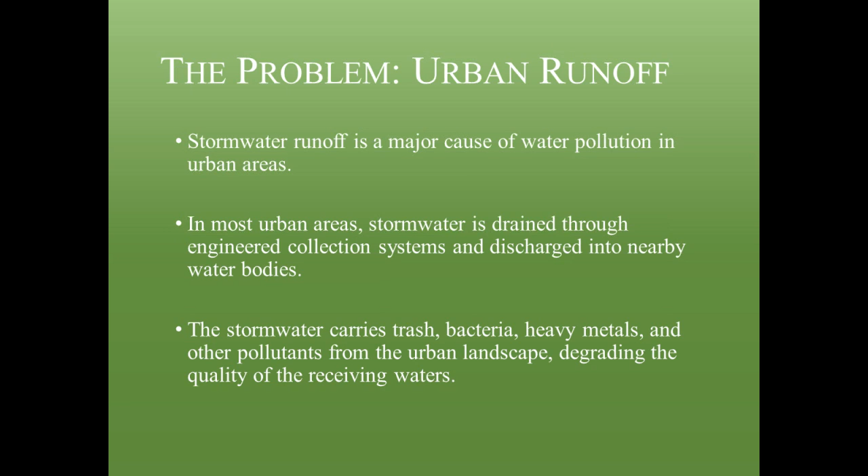Communities are facing many challenges with the increase in impervious surfaces. It means higher peak flows, and even on the best days, when we do water quality monitoring in San Diego, any kind of rainfall event will cause our beaches to become contaminated. That's not because of sewage, it's just runoff from streets and people's landscapes. We've long recognized that this is now a leading cause in the United States of water quality impairment.

So even small amounts of impervious surface cover can lead to significant impacts.

Let me go, sorry—you were not following the same slide I was. All right, that's where we were. Can you go back? Okay, let's get normal. All right.

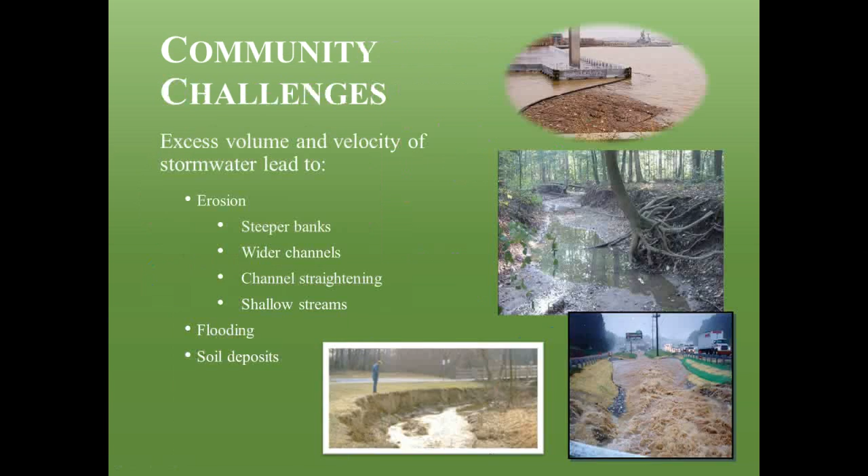So what is green infrastructure? EPA defines it as systems and practices that use or mimic natural processes to infiltrate, evapotranspirate—the return of water to the atmosphere either through evaporation or by plants—or reuse stormwater or runoff on the site where it is generated.

Green infrastructure uses vegetation, soils, and natural processes to manage water and create healthier urban environments. At the scale of a city or county, green infrastructure refers to the patchwork of natural areas that provides habitat, flood protection, cleaner air, and cleaner water. At the scale of the neighborhood or site, it refers to stormwater management systems that mimic nature by soaking up and storing stormwater.

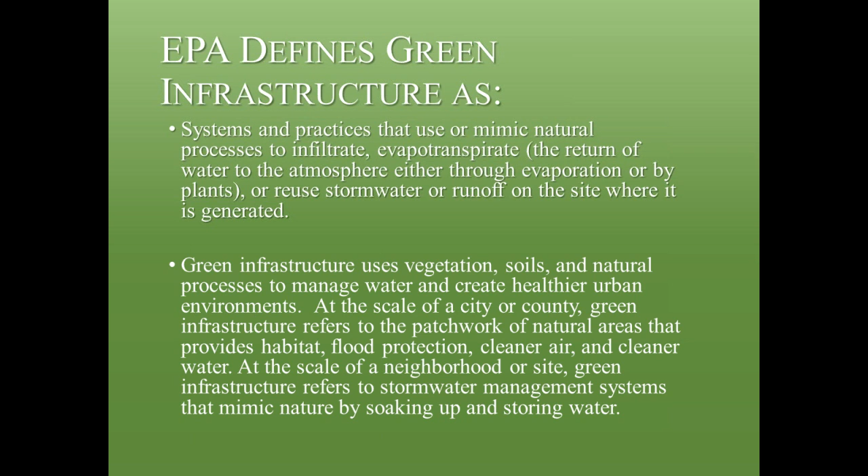One of the questions I had when I first heard the term green infrastructure is what's the difference between that and low impact development. Does anyone have an answer? Because I still don't—I think it's sort of the term of art today for what we used to call low impact development. It's rebranding.

All right, let me see how—okay. Green infrastructure solutions for water quality and quantity have benefits for pollutant discharges. It reduces flooding, and has stream and groundwater impacts. It also has significant benefits to air quality by sequestering carbon, and it's a great benefit to the community.

We all know, especially in the border region, the amount of green space available for residents is very limited and gets smaller every day. So if we can do projects that increase the area of green spaces, providing the community and residents with recreational opportunities while improving water quality, it's really a win-win.

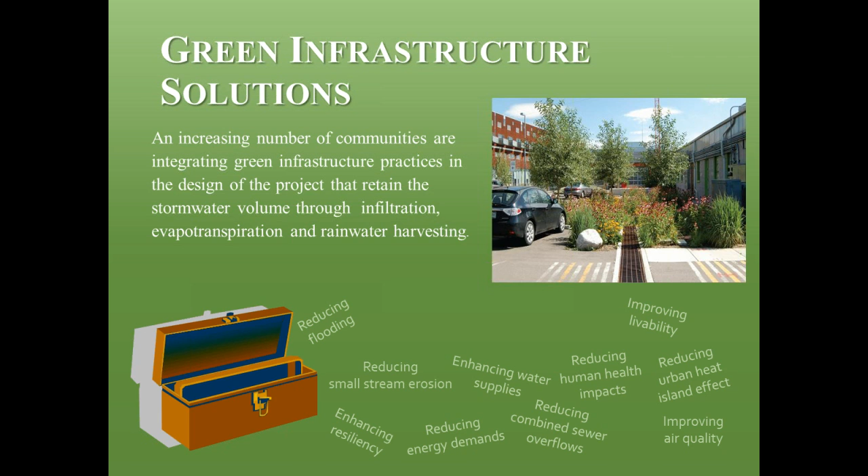I'm going to get good at this fairly soon, but these are terms you will hear and may already know, though some of you may not. There will be a quiz on this a little bit later, so you can write down these terms, or I'll share this PowerPoint with you in a bit.

Rainwater harvest systems, detention ponds—these are considered dry ponds. Retention ponds, which are considered wet ponds, are things like artificial wetlands or pools that capture stormwater but are maintained as wet, which probably in the Southwest is not the best green infrastructure example. There's also bioretention basins and rain gardens, which are very common.

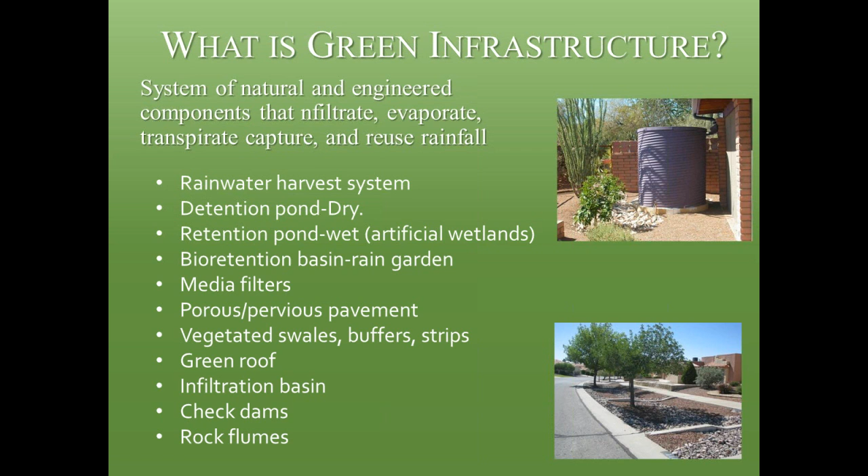We're seeing these used to treat runoff from parking lots. There are also media filters, porous or pervious pavement, vegetated swales, buffer strips, green roofs, infiltration basins, check dams, and rock flumes. I'm going to give you an example of each of these, but again, this has huge benefits in all of these following areas.

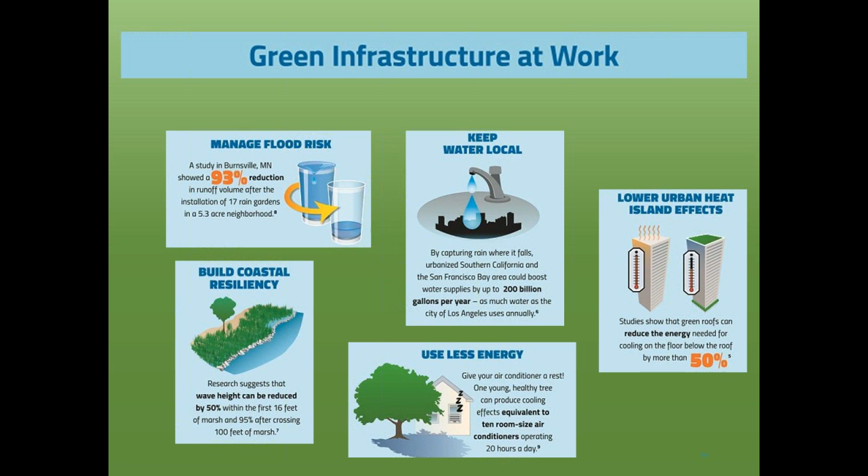All right, you're on the same page.

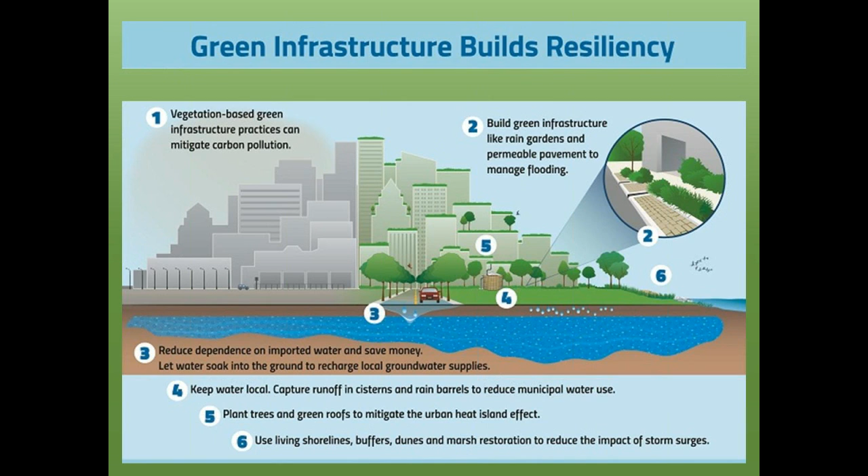Cities in the United States are starting to invest heavily in green infrastructure, building things like rain gardens and pervious pavement. You're going to hear these terms again and again: reducing dependence on imported water, keeping water local, planting trees to cool the cities, and using living buffers as a means of reducing storm surges.

These definitions come from our Office of Research and Development in Las Vegas. Rainwater harvest systems, they somewhat speak for themselves, but you can install these at a household level or on a community building as a means of capturing the water that's falling on your roof.

It provides a source of water, but it can also reduce the amount of runoff, which is very important in the Southwest region, where even a small amount of water can cause significant erosion problems. I'll show you some slides about Tijuana. We're looking at the idea of maybe putting some of these in Tijuana and seeing what impact they might have on reducing erosion.

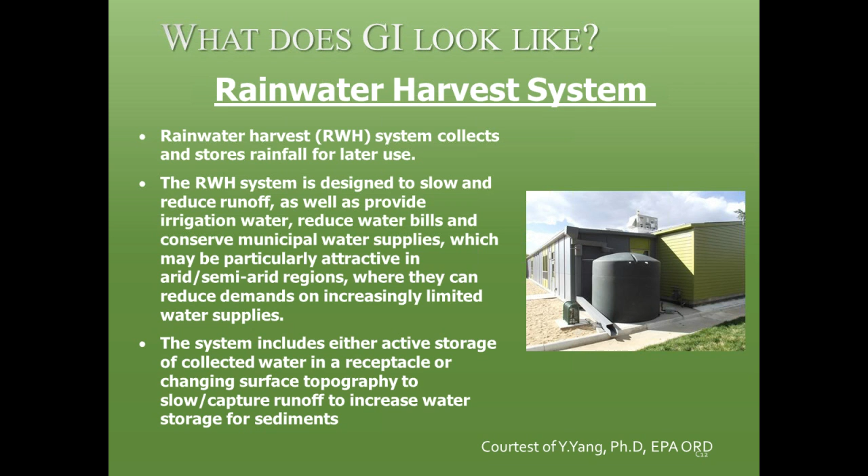The next is dry detention ponds, also known as dry ponds or extended detention basins. These are ponds designed to hold stormwater runoff, in this case for 24 hours, but we've seen even a short retention time significantly reduce pollution. The check dams we put in Nogales, Sonora have really created some dry detention ponds in essence, allowing pollutants to settle out and also reducing peak flows.

They're reasonably effective in removing sediment and other pollutants associated with particulate matter, and they can play a key role in downstream channel protection if appropriately designed, by reducing the peak flow runoff from storm events.

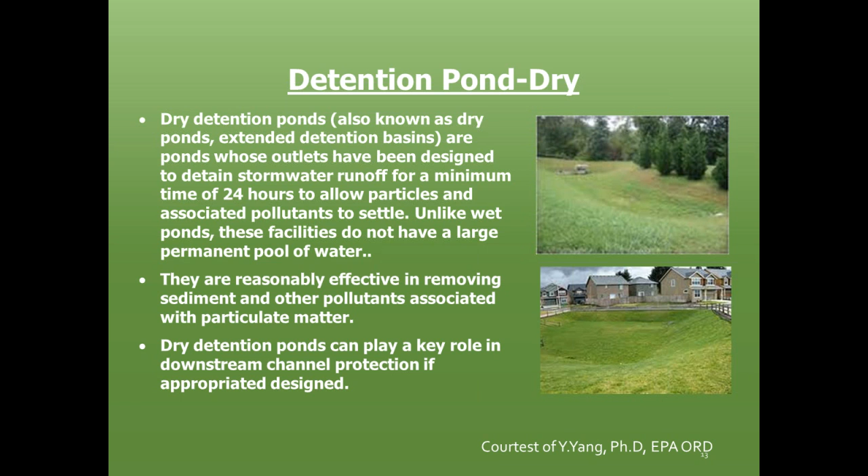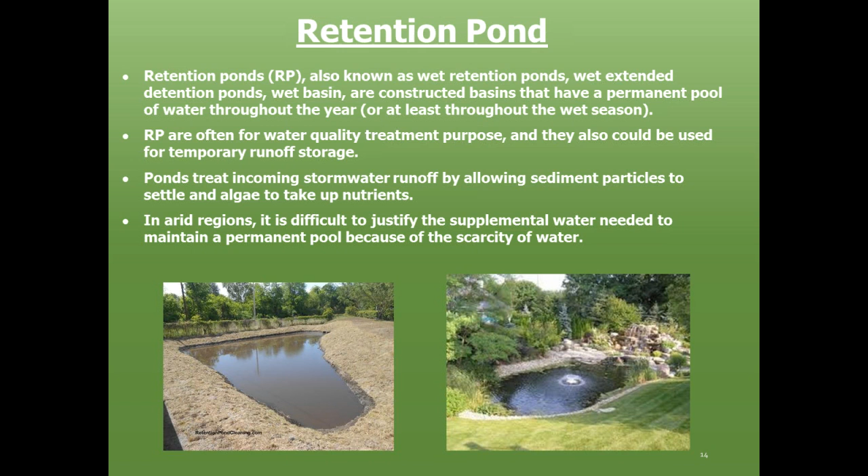Now these are wet ponds, and I haven't seen them in the Southwest region. Back east, I'm sure they're more common. I guess, perhaps wetlands used to treat stormwater - the problem with these is that they require a continuous source of water because they have to maintain the algae and plant life, which is what helps reduce the bacteria. So in the Southwest region, where our rainfall is so periodic, it's hard to maintain that. But now you know about it, so you can remember that term the next time you see one.

Bioretention is rain gardens, and I like to think of rain gardens versus swales. Rain gardens tend to be used on a smaller scale for things like parking lots, and you'll see a lot of examples of these in some later slides. They use landscaping features essentially in order to capture local stormwater runoff.

Finally, there are media filters. I know Carmen is working with some people at Filtrexx, using some of their compost as a means of providing compost socks as a way of reducing sediment runoff. The whole concept is to try to keep as much stormwater on site as possible, reduce peak flows, and keep pollutants out of the storm drain system. This is what compost socks or sand filters can do at a very local level.

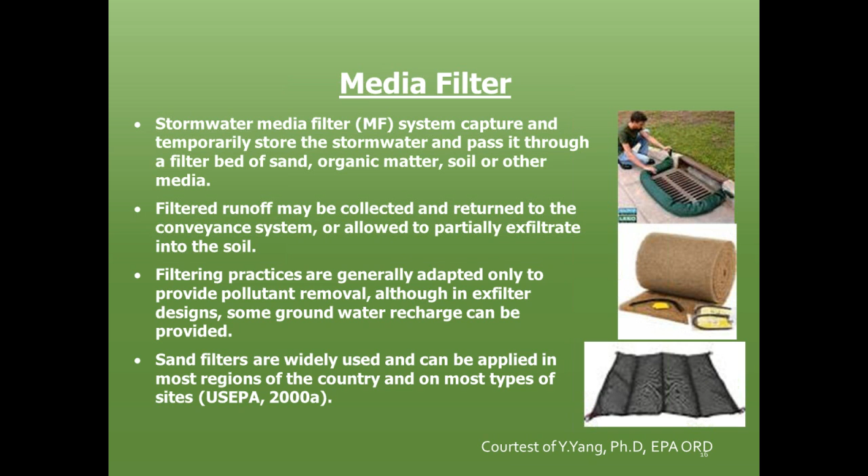Porous pavement is one of the most popular options, and we have actually tried to do this in Tijuana. It's not super simple, in that it requires you to understand your soil quality, how pervious it is, have some type of substrate or rocky material above the surface, and then apply the pervious pavement on top of that.

I think this is an area that deserves a great deal of attention, to know where it's appropriate to use. The gym I work out at has it, and I notice it does a tremendous job at reducing stormwater—you never see flooding in that portion. If we had that when I was working in the paving business, I certainly would not have had to raise that issue.

The thing is, on highly trafficked areas it does wear down much more quickly, so it makes sense for certain areas, and it's important to know where those are. I'm really hoping this conference helps us identify the appropriate green infrastructure practices for each place, because it's easy to say you can put in pervious pavement, bioswales, or water cisterns to capture rainwater—but these things cost money, and somebody has to invest in them. If we can figure out where you get the most bang for your buck, I think that's the goal of becoming more educated in this area.

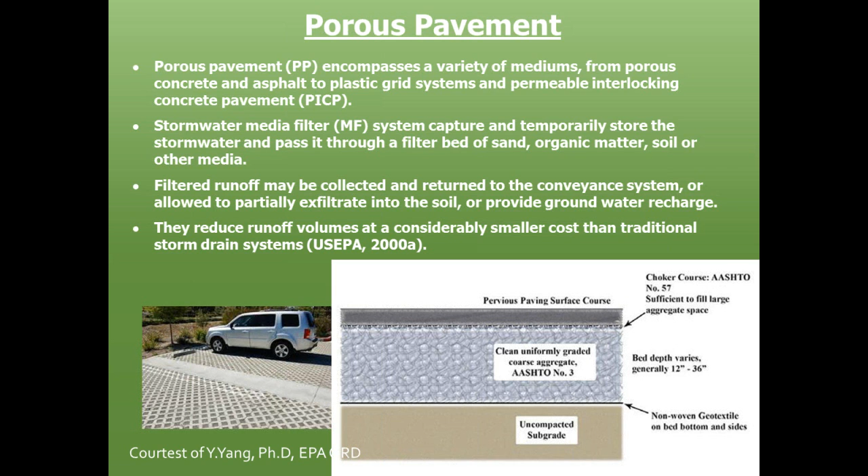This is vegetated swales, buffers, and strips—very common, also referred to as grass channels, biofilters, bioswales, or swales. They refer to vegetated open channel management practices designed specifically to treat and attenuate stormwater runoff for a specified water quality volume. As stormwater flows, it's treated through vegetation, slowing the water to allow sedimentation, filtering through a subsoil matrix, or infiltrating into the underlying soils. Swales are well suited for treating highway or residential road runoff because they are linear practices.

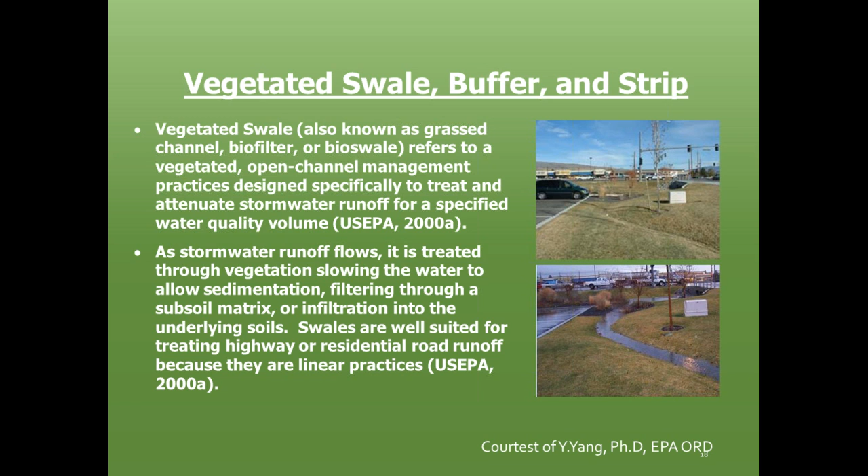Green roofs—they kind of speak for themselves, but it's putting vegetation on top of the roof as a means of capturing water and cooling the residents. It can be effective in reducing stormwater runoff simply by capturing water, similar to water harvesting practices. I added 'don't try this at home,' because years back there was a building in Europe that collapsed because it wasn't designed for a green roof—someone decided to add a garden on top over time, and the weight of the material ultimately collapsed it.

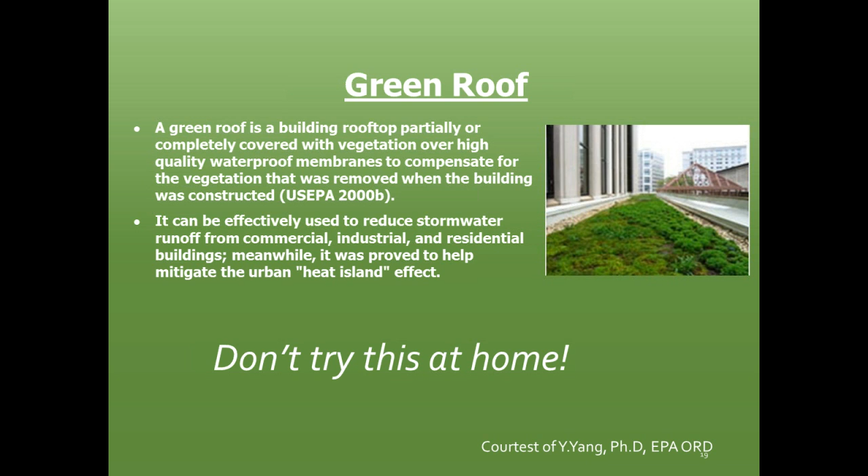So I think it's a great thing for new developments. For existing developments, you really have to know what weight your building is designed to take and study it well, as opposed to trying it after you return from this conference. There are other things you can try, but that's not one I'd recommend.

Finally, there are infiltration trenches—a rock-filled trench that receives stormwater runoff but has no outlet. This system is designed to infiltrate stormwater into the soil. Runoff passes through some combination of pretreatment measures, such as a swale or detention basin, and then into the trench, where it's stored in the void space between stones and infiltrates through the bottom into the soil matrix. This is really the final destination of the stormwater.

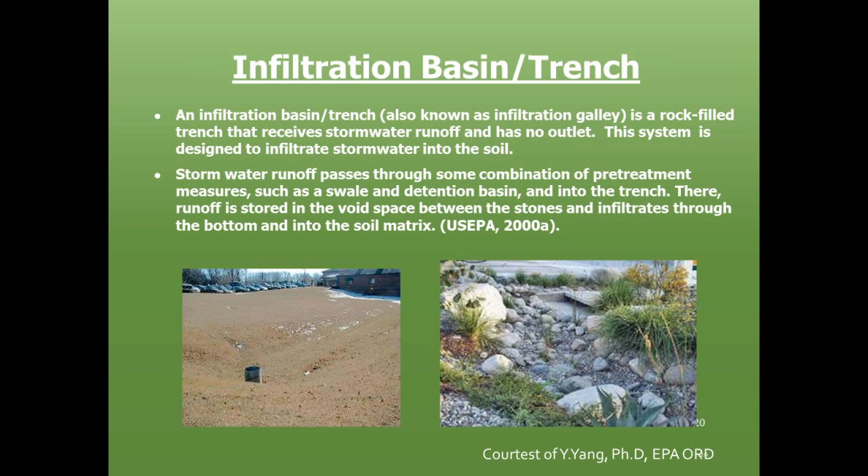We're going to go through some examples now, starting with a very large-scale example in Milwaukee, Wisconsin, where an entire brownfield site was revitalized to mitigate the impact of a 100-year storm event. This is a 70-acre stormwater park that also provides a high-value community recreational asset.

Where am I? How did that happen? All right.

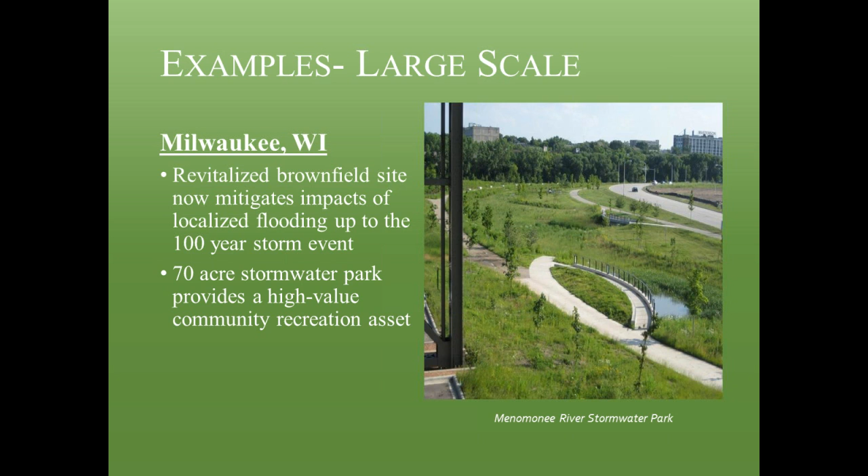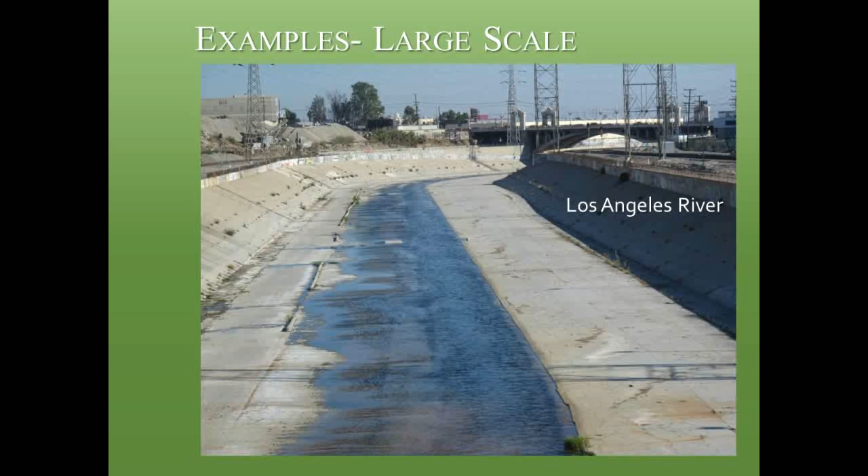Here is the LA River, another very large project. This is what the current designs look like—this has not yet happened. This is the LA River, and this is what they are looking at for the LA River. There are designs in place.

Right now it's just lacking funding, but this is the ultimate goal for the LA River. We see in Mexico and in the United States areas that are continuously being channelized for flood control. Meanwhile, the city of Los Angeles is spending millions of dollars trying to remove that concrete to return the system to a more natural state. Looking at ways to prevent these problems can help us in the long run avoid spending huge amounts of money trying to return the system to its natural state.

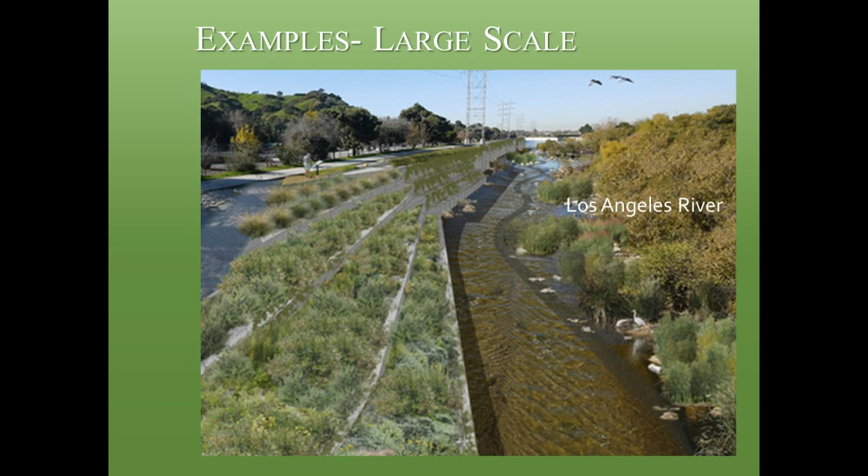So, audience participation time to wake you all up. This is, and anyone except for Brad, the top picture is one of the different practices I mentioned. I was going to go buy some candy bars or something, but unfortunately I came straight here, so I have nothing to offer. Anybody? All right, I'll give it away.

It's a rain garden, with some curb cuts and a rain garden. It was planted in the city of Austin.

And then the one below—this one's an easy one, even I got this one. Pervious pavement, right? Porous or pervious pavement. This is in the San Antonio River Authority.

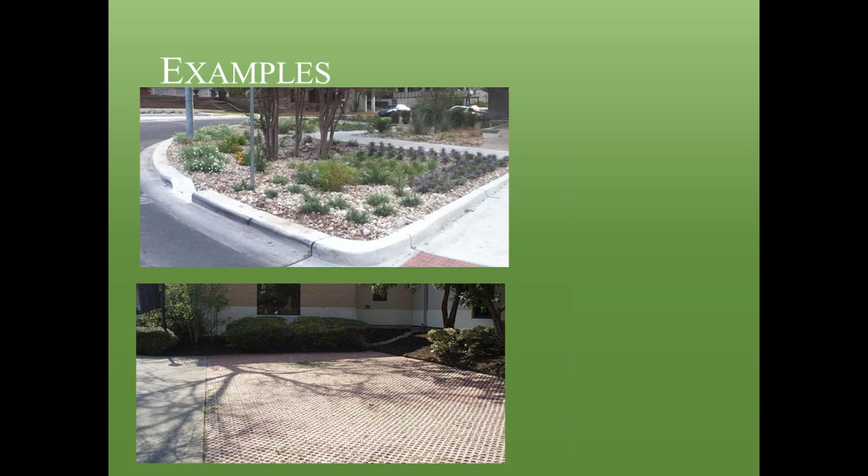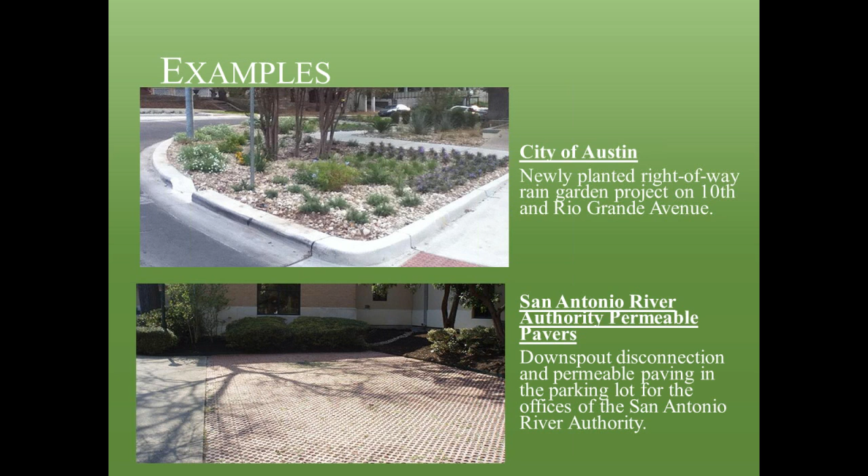This is so great because I have my notes here, so I know the answer before you all do. Anyone have a guess at this? Bioswales. It's hard to see from this photo, but these are bioswales, located in Birnamwood in Harris County, Texas.

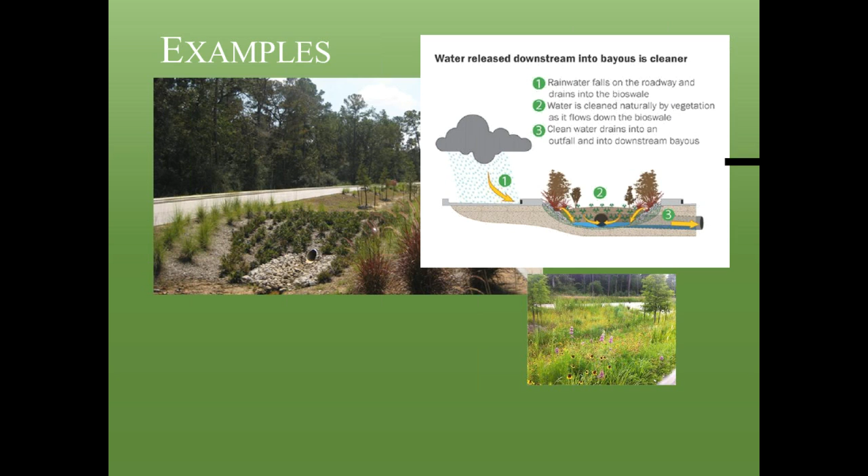So you know, if Texas is doing this, anyone can do this. Sorry, it's not being recorded, right?

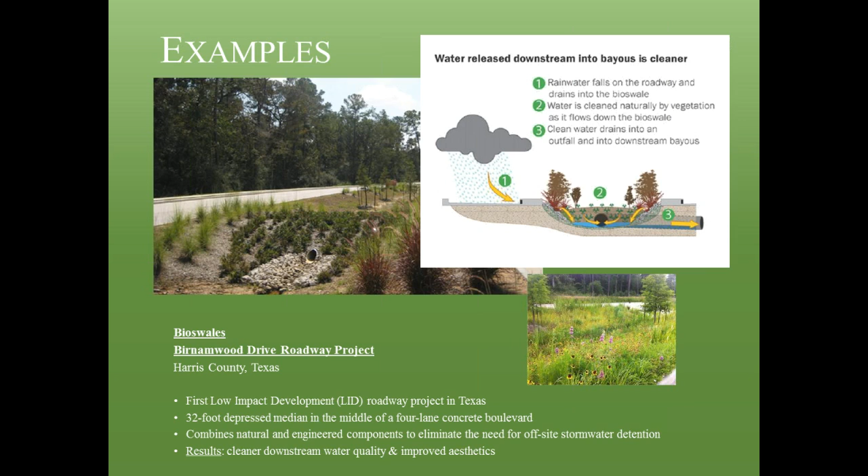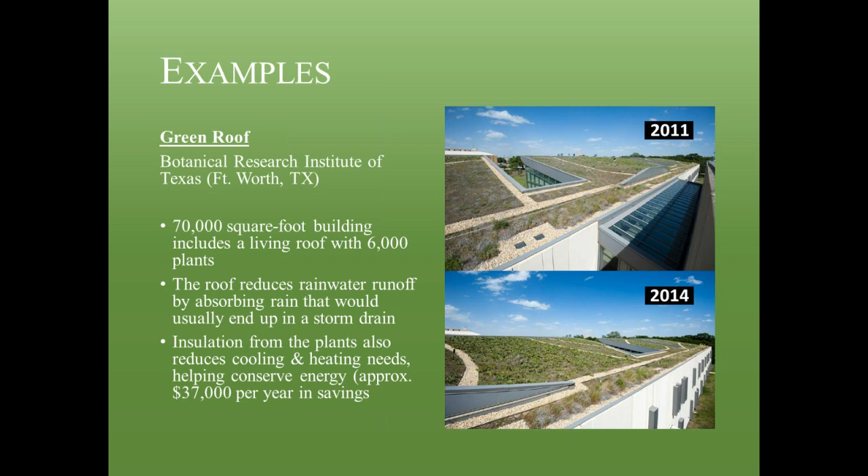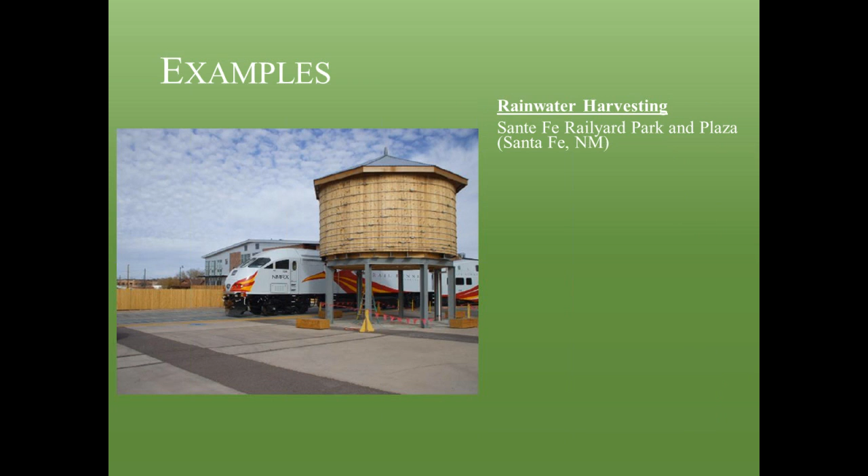This one is rainwater harvesting. Thanks, Carlos. This is in Santa Fe, New Mexico, a 12.5 acre facility that captures and stores rainwater from nearby building roofs. Water is stored in underground tanks, as well as a 35,000 gallon tank you see here, and is used for irrigation throughout the park.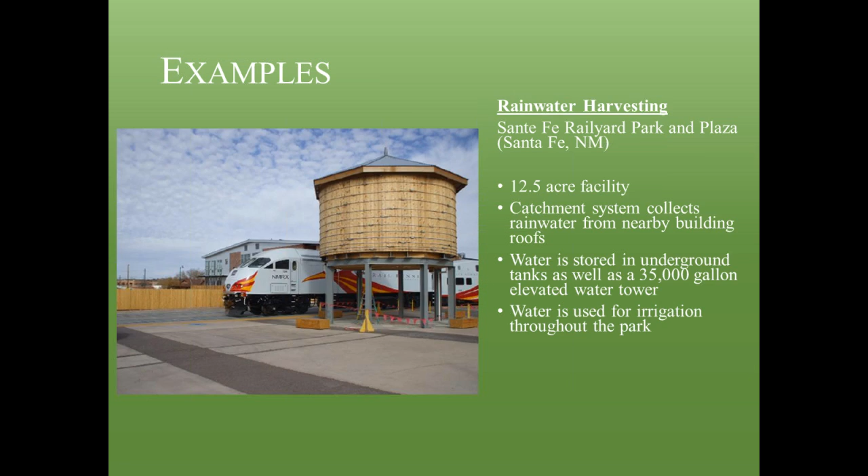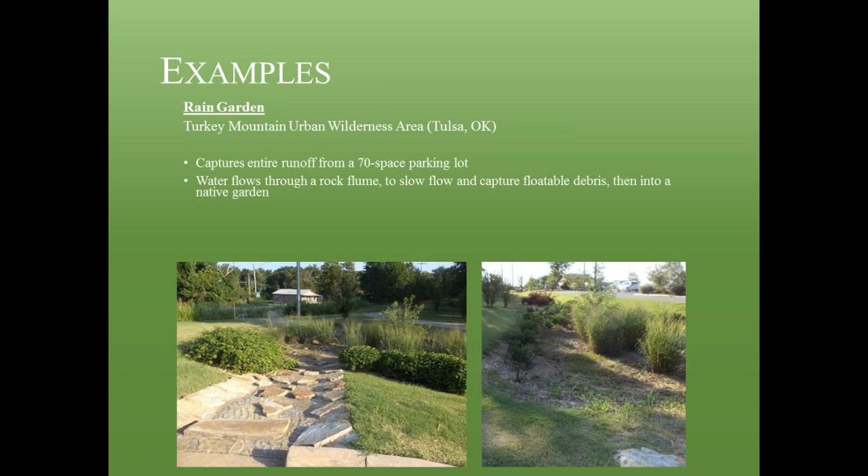So this one on the left is kind of tough—it's a rock flume. I'm not seeing these very much, but the idea is not so much to let the water infiltrate, but really to slow the flow so that it doesn't cause significant downstream impacts. It captures runoff from an entire 70-space parking lot, and water flows through a rock flume to slow flow and capture floatable debris, then into a native garden. The garden captures sediment and filters pollutants, and there's an attached detention area to capture the remaining runoff.

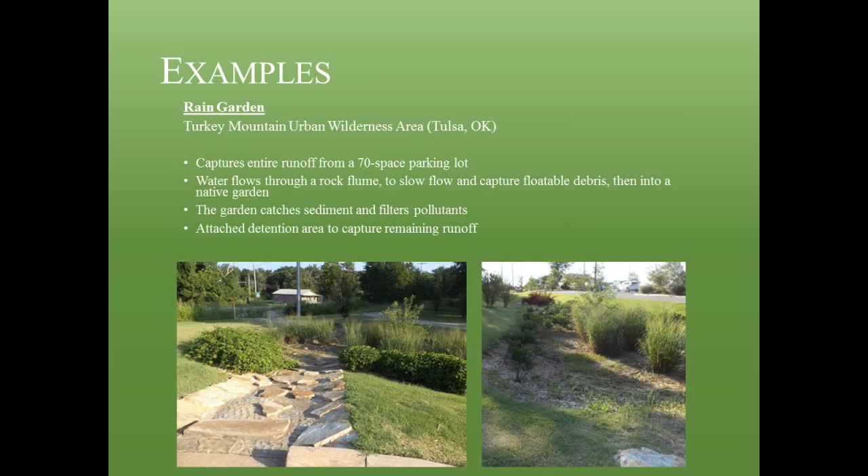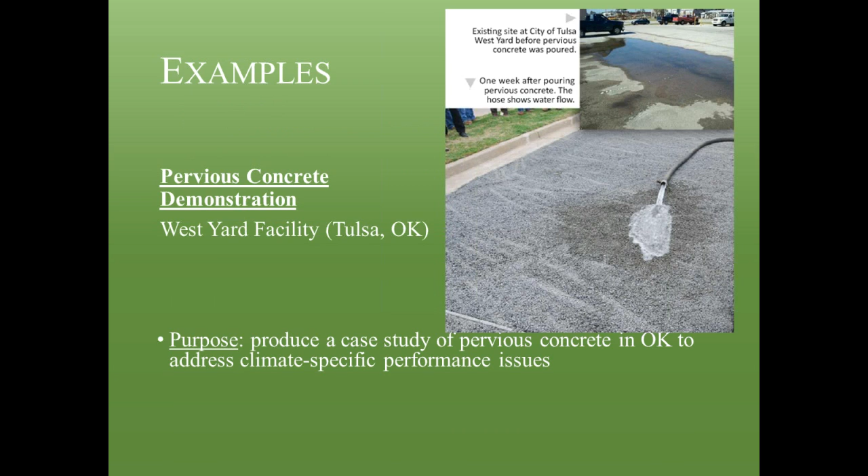This one we've had before, so I'll go quickly—it's pervious pavement in Tulsa, Oklahoma. I don't think we had to reach all the way to Tulsa to find an example of pervious pavement, but the benefit of this project is that it certified 20 people as pervious concrete technicians, dramatically increasing the number of technicians in Oklahoma. The demonstration lasted 2 years and was monitored quarterly by Oklahoma State University graduate students. This is the kind of research I think is really needed in this area.

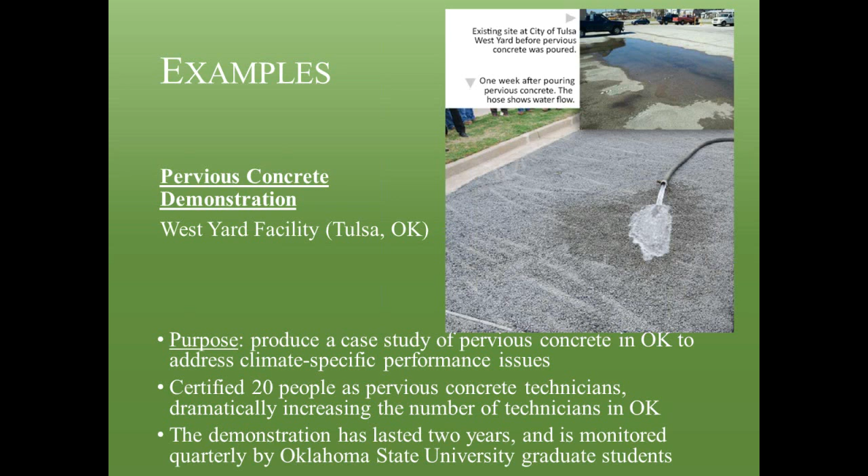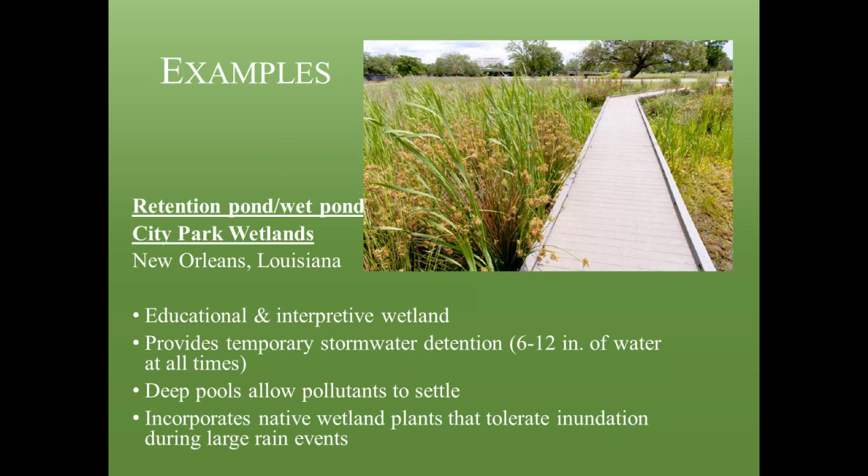The reason this is a wet pond is because it has at least 6 to 12 inches of water at all times, and it has some deep pools to allow pollutants to settle. It also incorporates native wetland plants that tolerate inundation and flooding during large rain events.

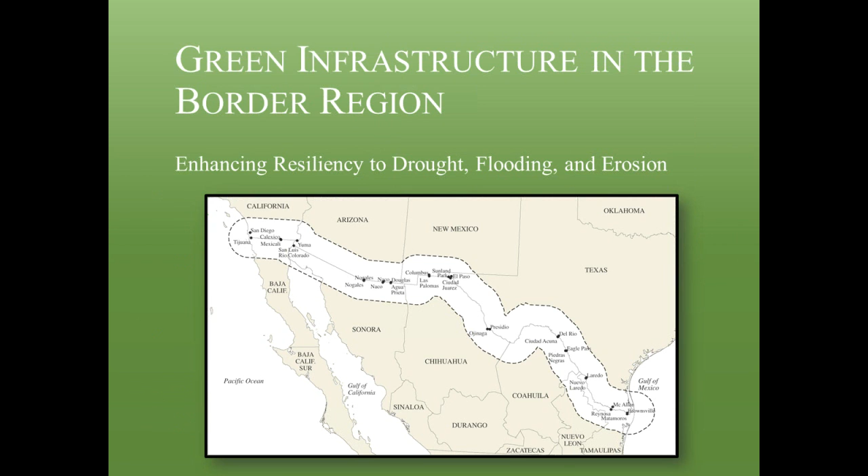Okay, let's go to an area that I actually know something about. This is the border region, and this is work happening in the city of Tucson, largely due to the efforts of NGOs like the Watershed Management Group, and Brad's work—he'll be talking later, so I'll leave that to him.

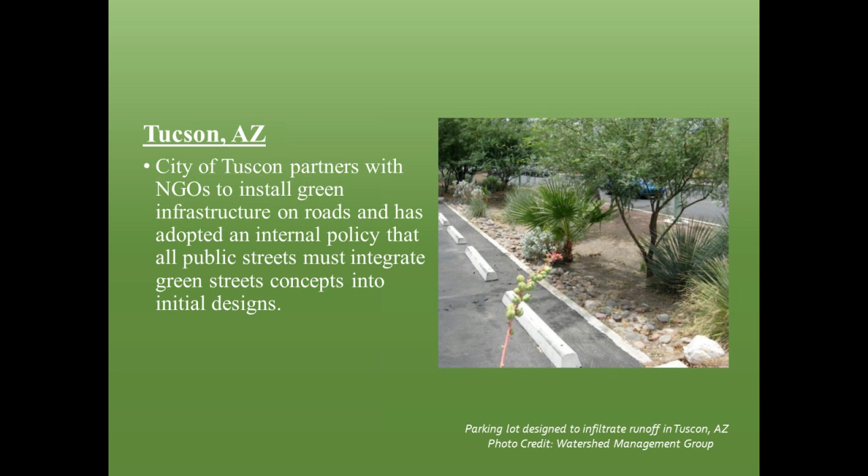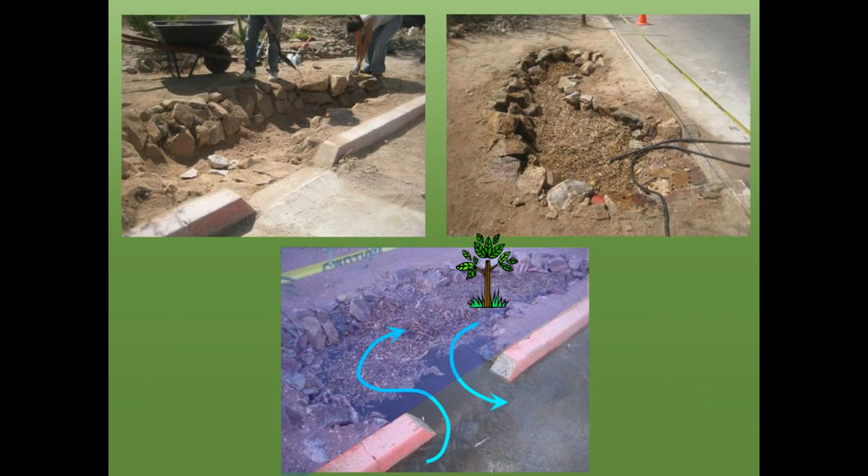This is some of the work they're doing to create local rain gardens as a means of capturing stormwater. I'd really like to thank Hans Huth from ADEQ for helping me—he sent me these examples at about 1 in the morning from his mom's house, because I really wanted to have some examples from the local area.

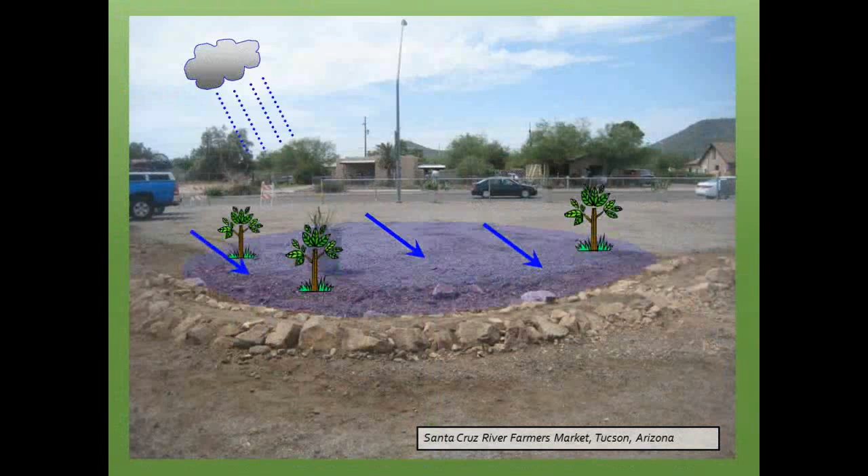Here's some work they've done at a farmer's market to try to capture stormwater runoff that would normally flow off site. Here's a great time lapse of a community that has retained all of its stormwater on site—this is what it looked like before, and this is how it transformed over the course of about 3 to 5 years.

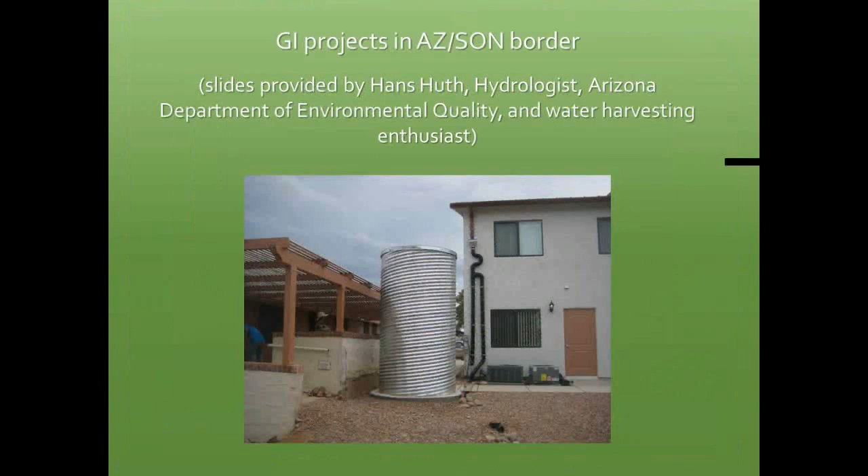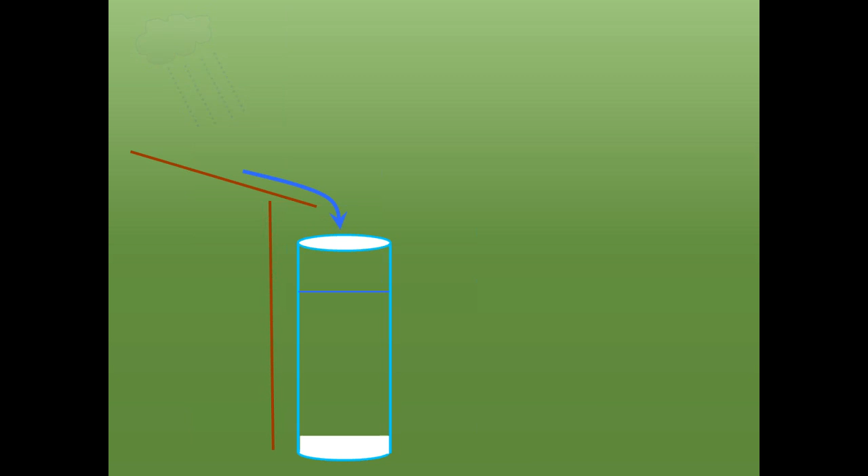So again, we know what these rainwater capture systems do, but they can take many shapes and sizes. These are people in Tucson making their own, and you can also buy these systems now at the hardware store. These are some bioswales that have been installed in Tucson.

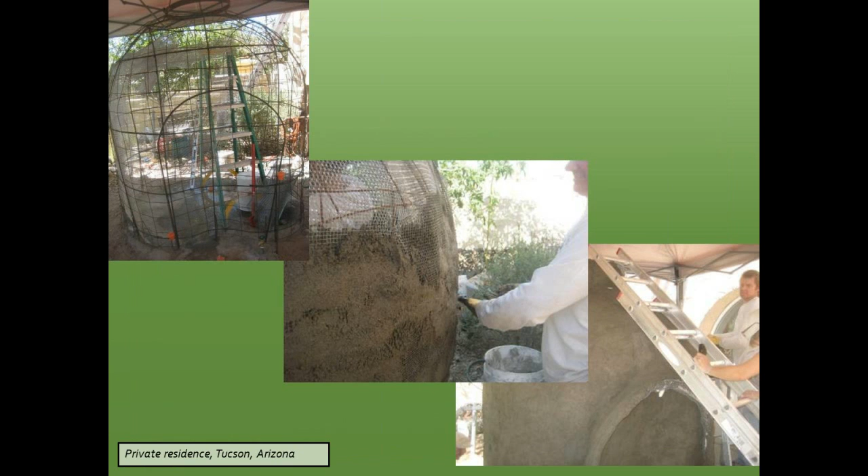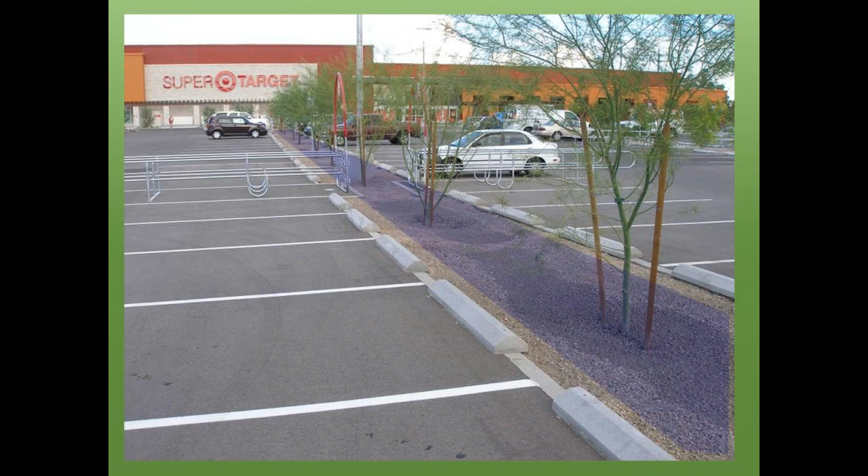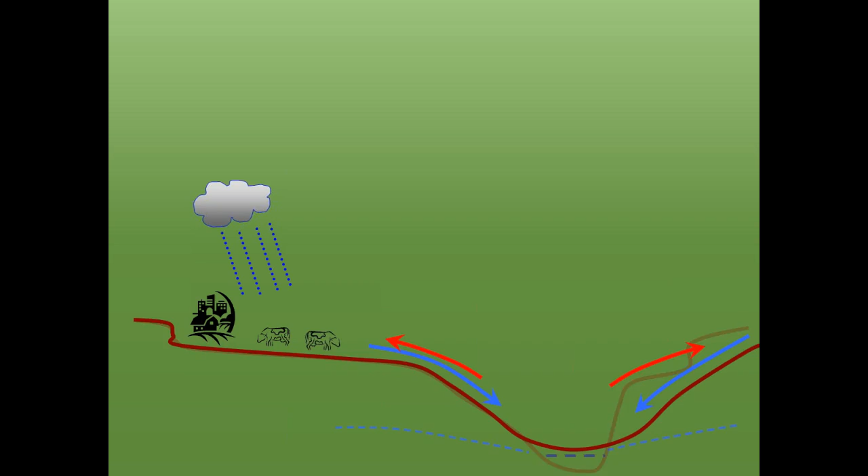This is just some landscape work they've done. As trees get removed, it changes the contour of the natural creek or river. So what the Watershed Management Group did was go in there—this was, I believe, with some funding from EPA—to recontour the areas in order to make the best use of the stormwater runoff.

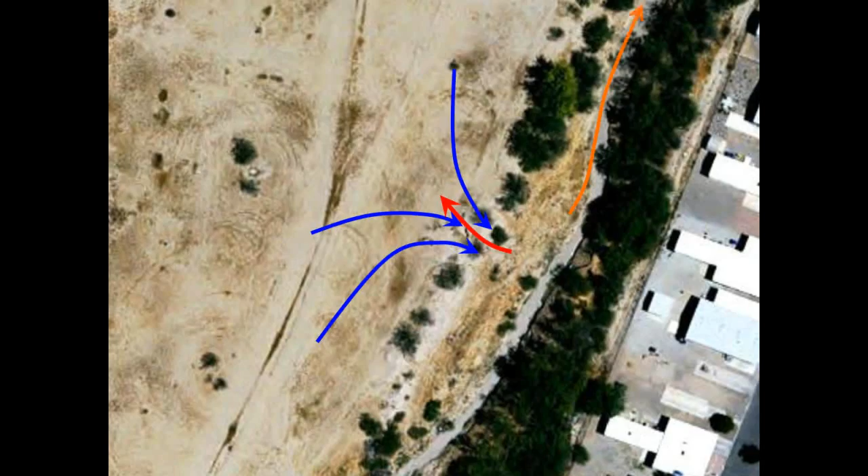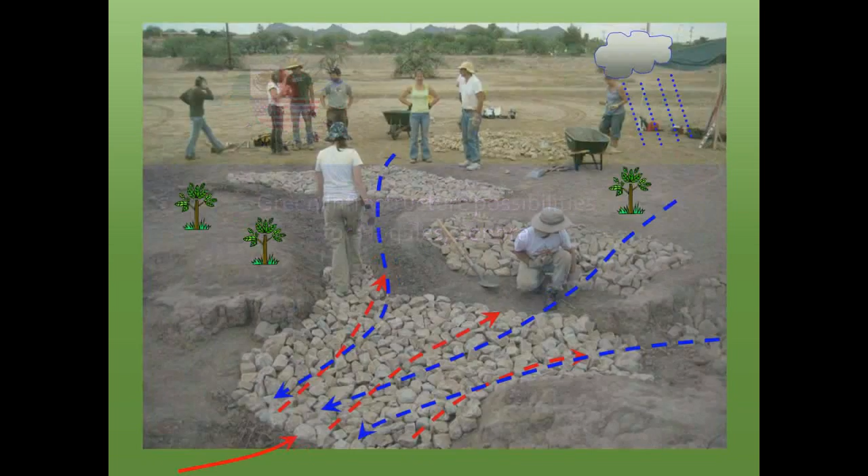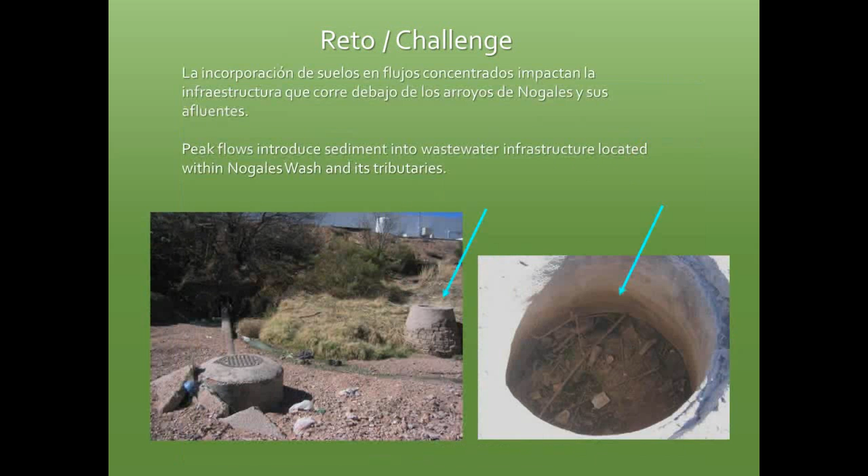So how can we apply these approaches on the Mexican side of the border? Just to give you an idea of the problem, we have significant flooding issues in Sonora. When it floods, you'll see the arrows point to the sewer system, which overflows—a significant problem not just for residents, but also because it causes damage to wastewater infrastructure.

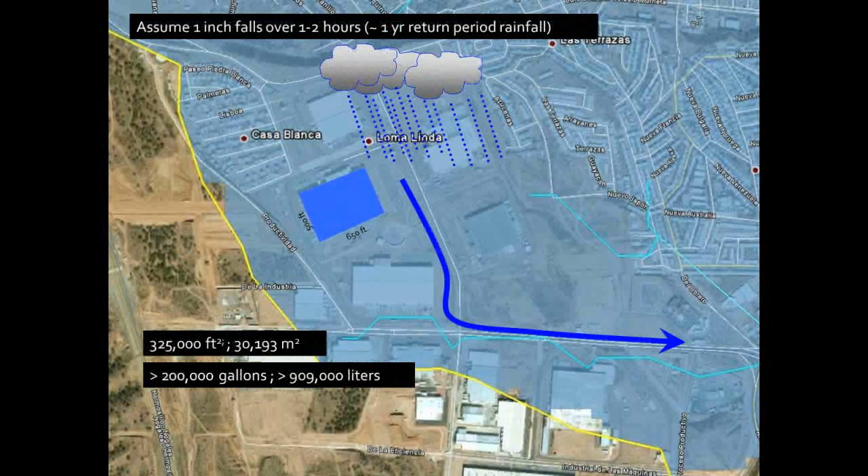One project ADEQ has done is to look at what would happen if we tried rainwater capture, and they've calculated how much this could help reduce peak flow events. To give you an example of the challenge: that one building, in order to capture a storm event of a 2-year or 1-year return period, would take about 137 of these devices—so it's not without its cost.

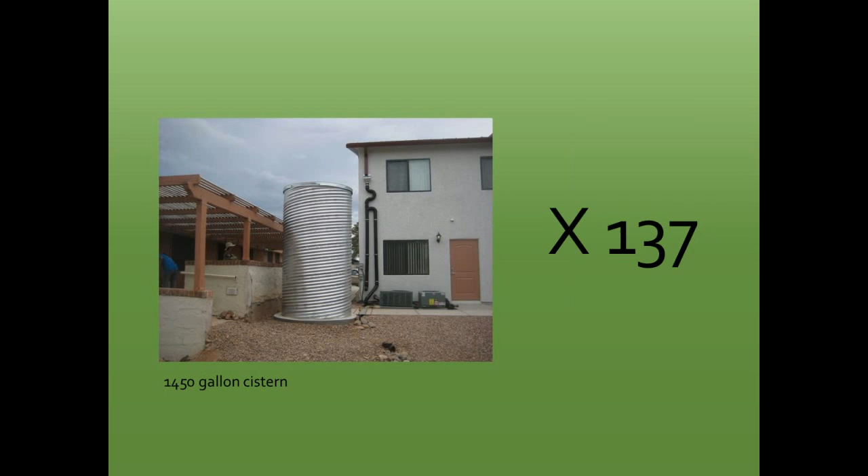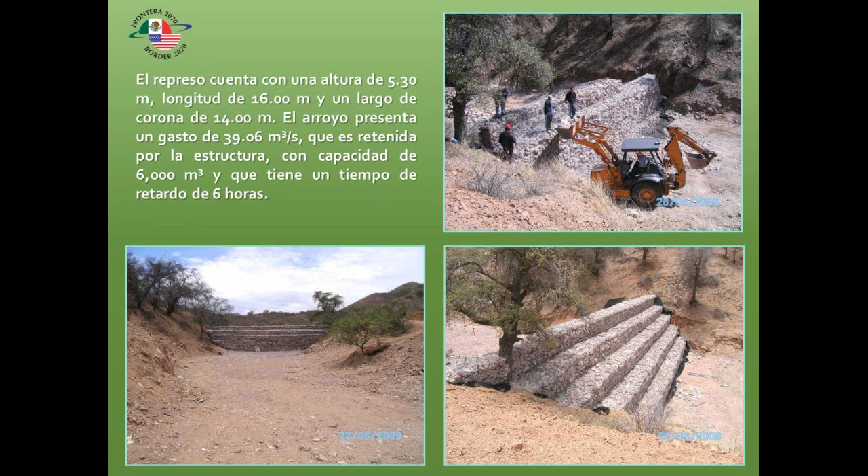These are some check dams we've built with Border 2020 funds—rock dams that allow water to pass through but reduce peak flows, and these have had tremendous benefits downstream. The USGS has actually modeled the reduction in flooding due to this reduction in peak flow.

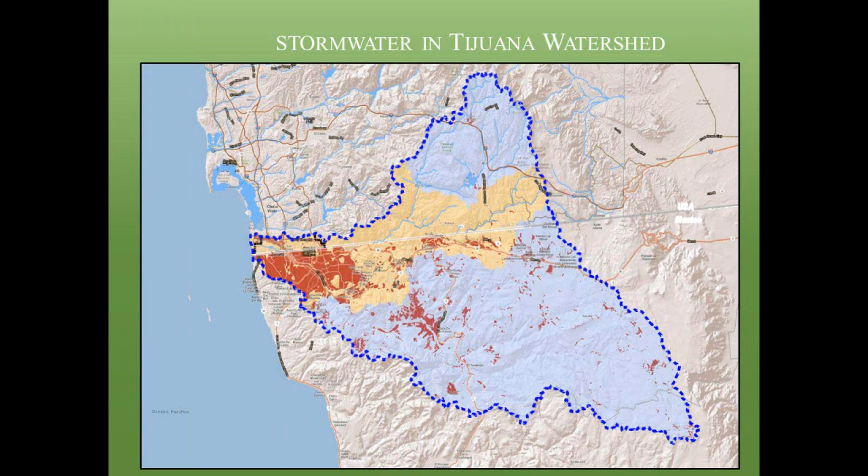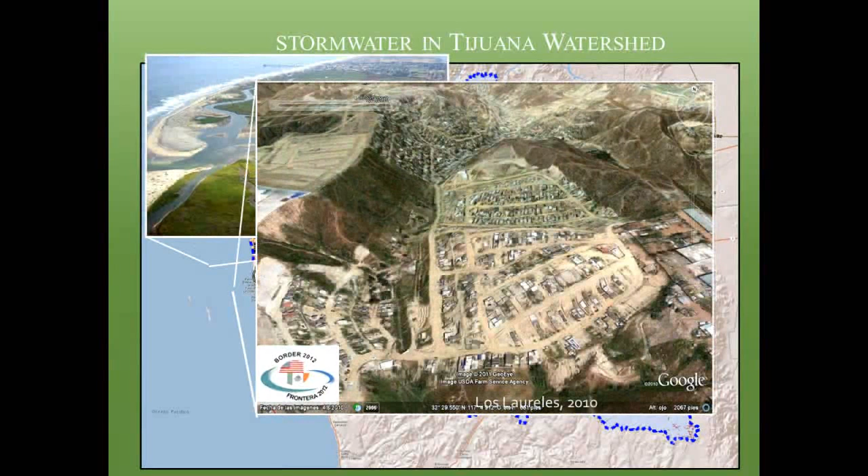I'm going to move to Tijuana now. Here's the problem we have there with very rapid urban development. We really appreciate the city of Tijuana being here today, because we're trying to figure out—as they are too—how to deal with this irregular development. Over the course of about 10 years, this is what it looks like today: there's no natural drainage, no road pavement, so when it rains, this is what we see.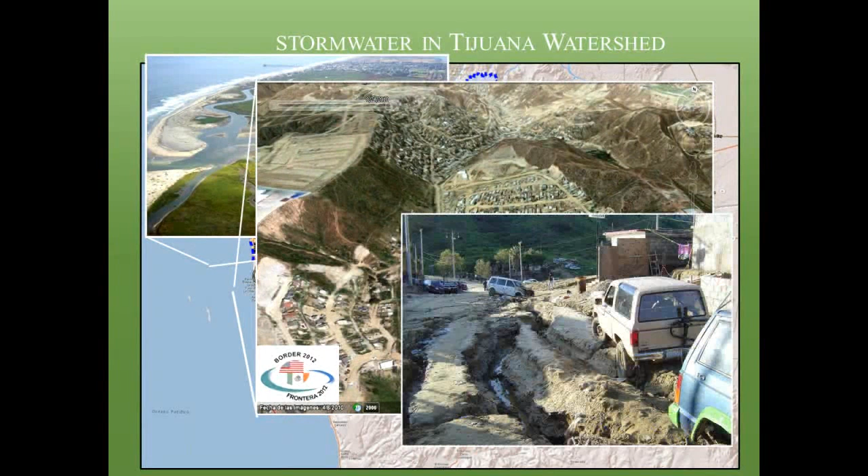And of course, right north of the border, we have an estuary of international importance that supports about 400 species of birds, which the U.S. is heavily invested in protecting.

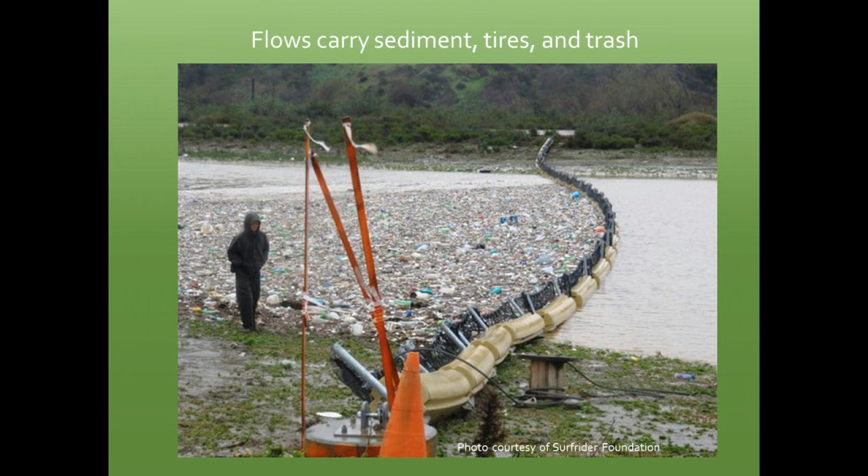Government is heavily invested in trying to protect this area. The state of California, in about 2003, built these sediment basins to try to capture some of this sediment. It also captures trash, but their capacity is oftentimes exceeded, and this is what happens downstream when that native vegetation—these are saltwater marshes—is affected; they really require that influence of tidal flow.

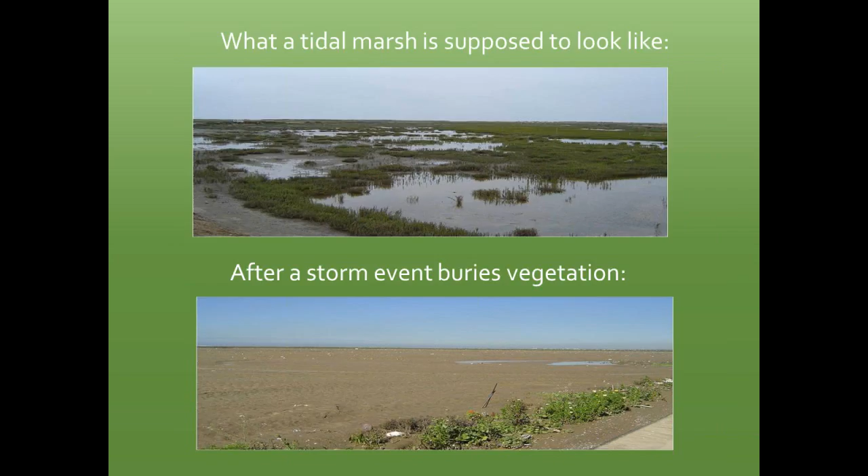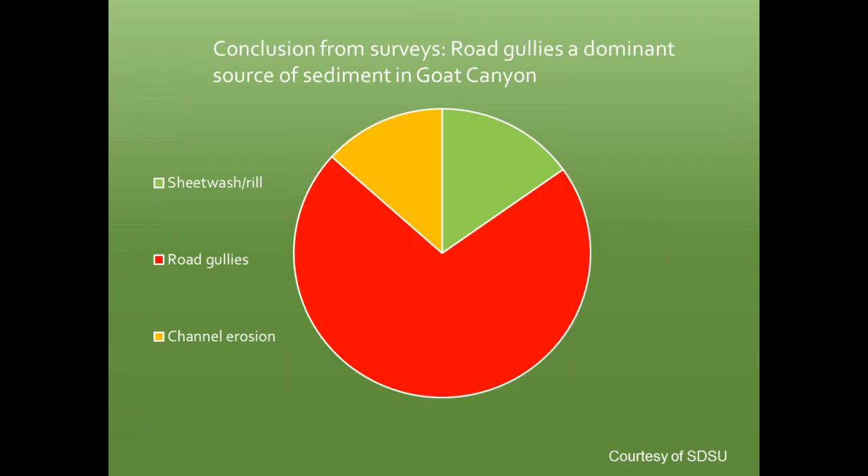This is new development currently going on in Tijuana. We worked with San Diego State, funding them to do a preliminary study, and one conclusion they reached quickly was that the gullies are, not surprisingly, the biggest source of sediment. So the question is, how do we reduce these sediments? How do we reduce these gullies? How do we reduce this erosion?

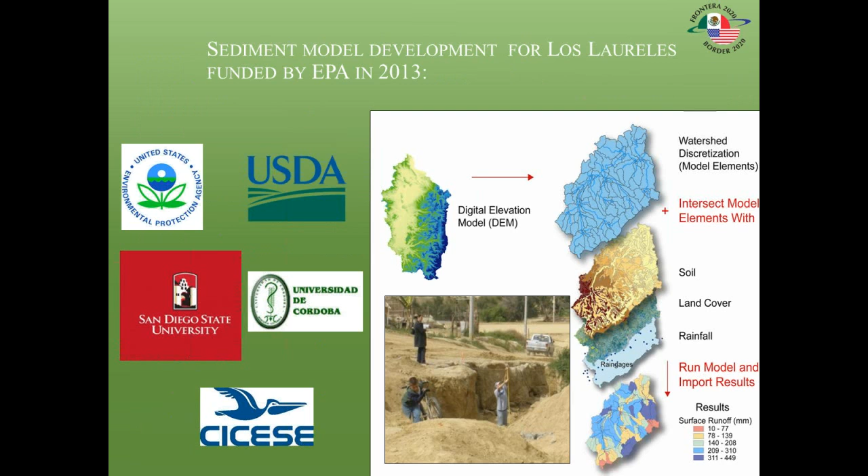So we've recently funded the U.S. Department of Agriculture, San Diego State, CICESE, and the University of Cordoba in Spain to build a model looking at the sediment currently flowing out of this watershed, or subwatershed, and what benefit might come from providing some green infrastructure.

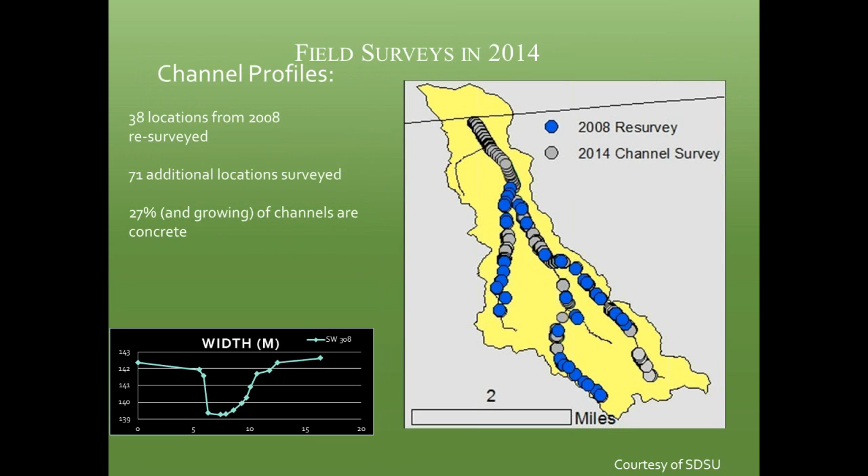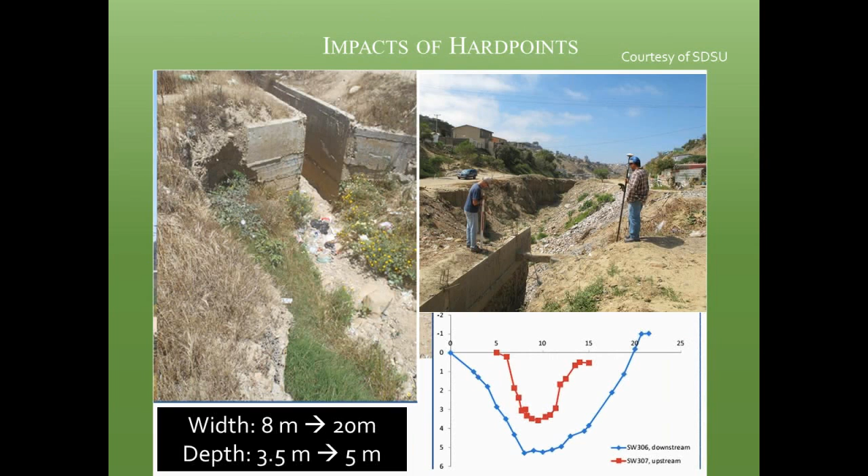So we've done a lot of work, and one thing we determined very quickly was the impact of these hard points. This really shows how critical green infrastructure is, because especially when you channelize only part of a stream, you can see the profile upstream of the channel versus immediately downstream—it really increases the velocity of the water, having a tremendous impact on eroding the banks of that creek.

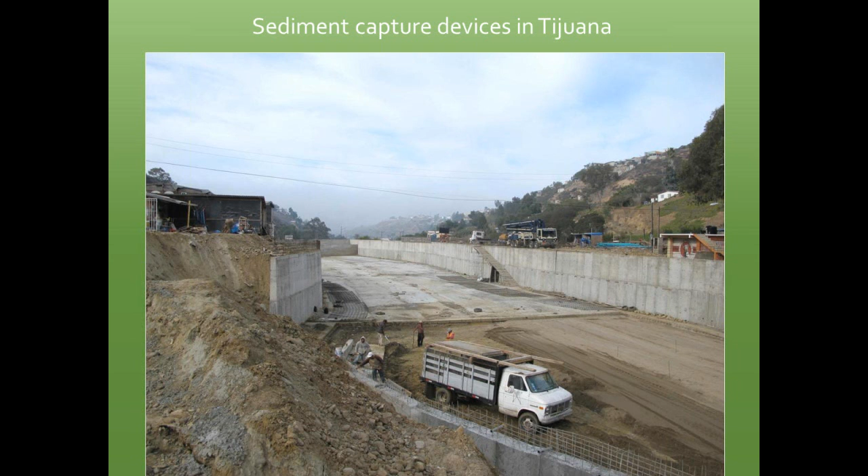This shows some of the efforts the city is making to capture that stormwater and sediment. But while these efforts will reduce the stormwater downstream, it's going to still be a very high maintenance item for the city to deal with.

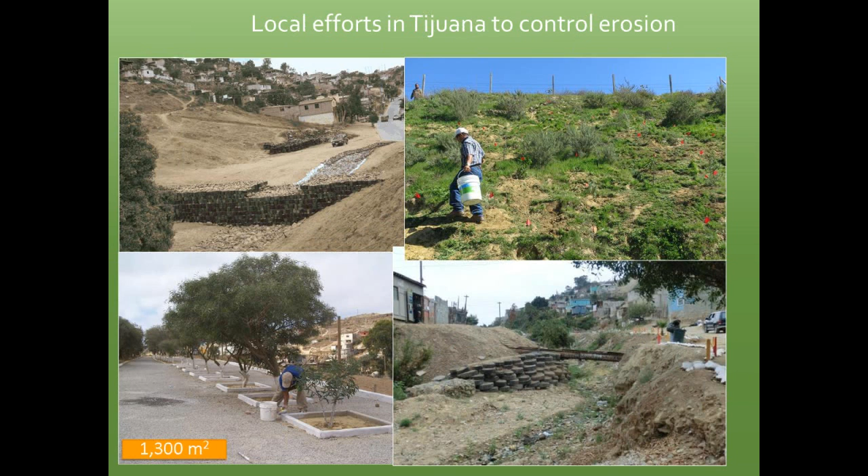So we're trying to look at ways we can invest in Tijuana with some green infrastructure as a means of maybe trying to reduce that.

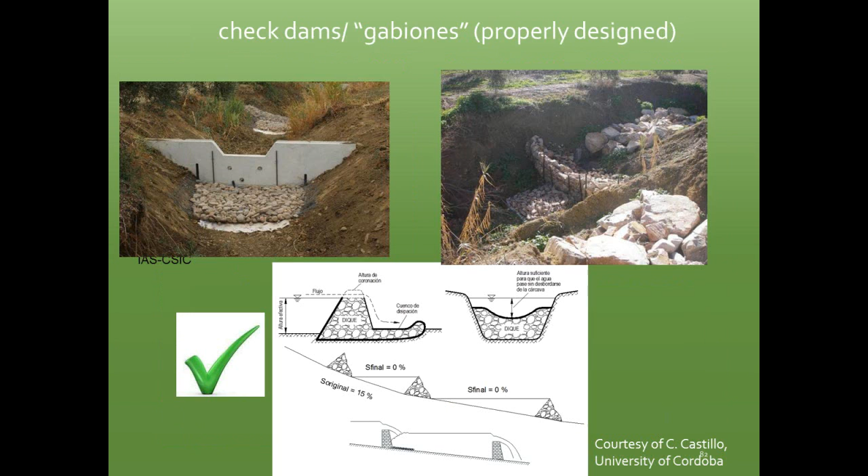So how is EPA involved with GI? I think you got a sense of that, but we really are trying to do both outreach and education—we're trying to develop tools. The Clean Water Act has really been a driver for this, for U.S. municipalities, pushing through the municipal stormwater program and permitting, pushing cities to actually adopt green infrastructure practices.

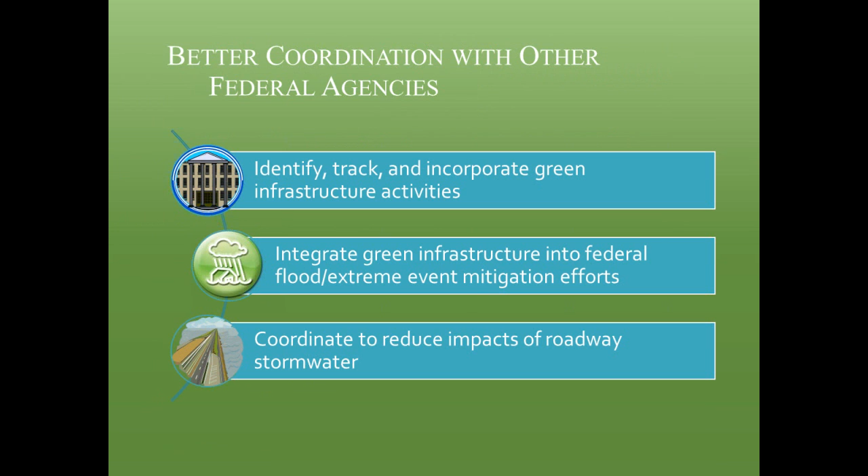We're trying to form partners. There's a huge amount of resources—I'll be happy to make these slides available, and I apologize to Claudia for not giving them due service, because she has a huge number of different resources here where we can provide help, guidance, and technical support. We also have funding opportunities; I know we fund universities to come up with green infrastructure designs on an annual basis.

You saw some projects we funded through the border program, but other agencies in the federal government have funding opportunities as well. And then we have manuals—I'm just going to go through these very quickly.

For future plans, again, the Clean Water Act has really been a driving mechanism. So the question is, how can we get these practices adopted in Mexico without that big regulatory driver? Because municipalities here are having to develop these things to comply with their municipal stormwater permits, but that's not necessarily the case in Mexico.